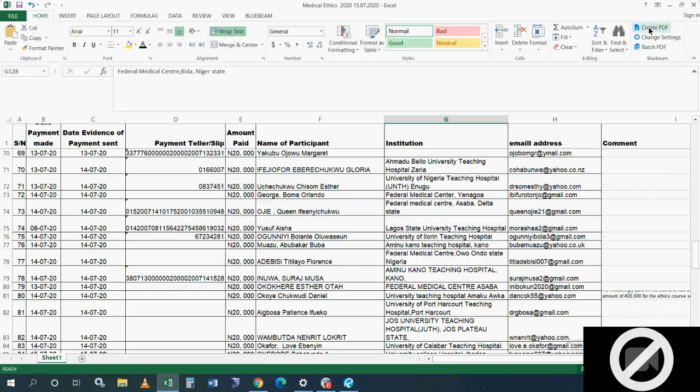You can see the plugin I'm talking about. This is installed in my Excel. I believe you can all see my cursor, right? So at this top right corner of this Excel file, you can see this is a plugin installed by Bluebeam on my Excel application.

So then there's Edit. You can edit files. Maybe you did something, you can undo. Although there are also shortcuts, Control Z, Control Y. Somebody said the most powerful tool in a computer is Control Z. If you make a mistake, you can undo. All right. So you can cut, copy, paste, delete. You can edit content. You can edit PDF. If there's something on a PDF file you really don't want anybody to see, or you want to remove, you can just cut it out, erase it, or what have you.

Then you can view, rotate, fit to page, manipulate your view. Then you can insert headers. Imagine you have a PDF document of about 400-500 pages, and you want something to appear in the headers and footers. You can do that here and apply it to all of the pages.

Now, there's something about collaboration in the construction industry, which we call coordination of drawings. You will agree with me that there are instances where the architect has done his own drawings, the M&E guys have done their own drawings. The usual practice with traditional procurement is that you get to site before you discover that there is one element in my structural drawing that is clashing with my mechanical and electrical drawing. But in our own little way, with these 2D drawings that our architects are creating, if they deliver them to us in PDF, we can overlay some of these things. I hope time will allow me to demonstrate this.

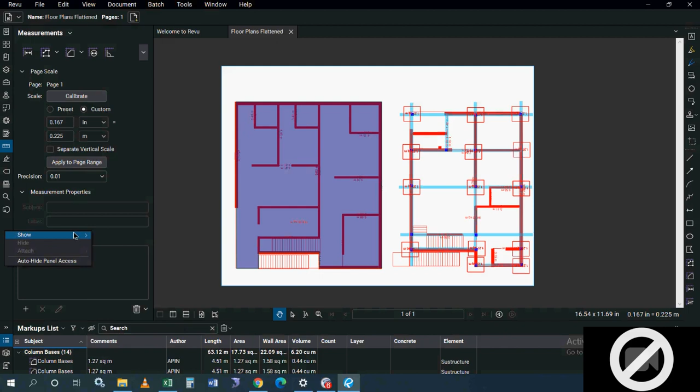Now if I want to make some of these inactive, let's say I don't want the bookmark to show. Okay, it wasn't showing already, but now it's showing. So for anything that doesn't show initially but you want it to show, or you want to remove it, just come here and do whatever you want with it. So, measurement.

Now there are quite a number of tools for measurement. You can drag wide or shrink this panel depending on how big your screen is, so that you can play around with your drawing. Now this is a length tool. This length tool can measure the distance between just 2 points. Assuming I want to go from here to here. Now let me make this document plain so that we can start from scratch.

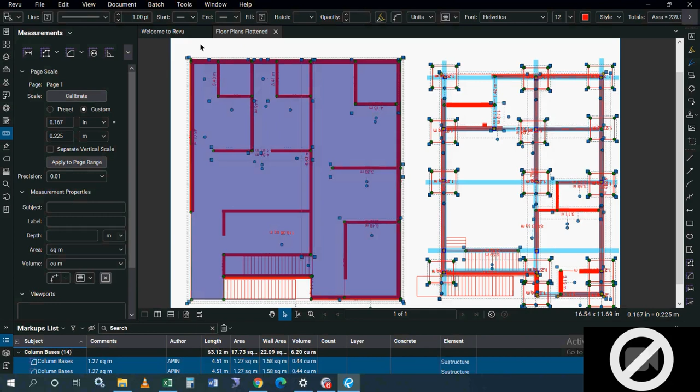Alright. Okay. Now, save as. If you have not saved your document before, you just want to save. So you come to file as I've done and you click save as. Then I have a clean document, sort of.

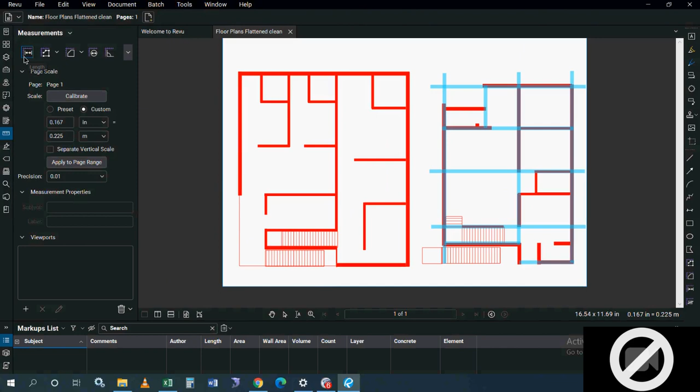Okay. So like I said, this is the length tool. What it does is measure the distance between 2 points. It cannot do more than that. You understand? It measures the distance just between 2 points. It wouldn't do more than that. Now, you want to use this polylength tool.

This polylength tool, knowing that we do a lot of measurements and we move from one direction perpendicular to maybe at an angle while still trying to take off an item, you want to make use of this polylength tool. The advantage it has over the length tool is, you can see, I can do multiple directions as I want.

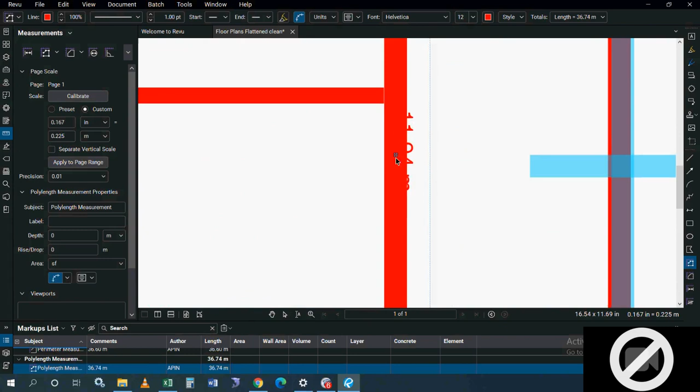Now this drop down arrow beside the polylength tool takes us to another tool under that same section called perimeter. The difference between the perimeter tool and the polylength tool is that the perimeter tool will just total all the lengths you have taken and, once you are done, give you one single figure for the length. Whereas the polylength tool would have segmented what you are measuring. So now we can see each segment having its own length. Every direction I turn has its own length.

Now you can make this bolder. When you select a tool to measure, you can come to properties, this gear icon. When you select an item and you want to make it bolder, you can come to the appearance section. You want to make it bolder, and where is the offset? Change the color to something different from the color of the drawing.

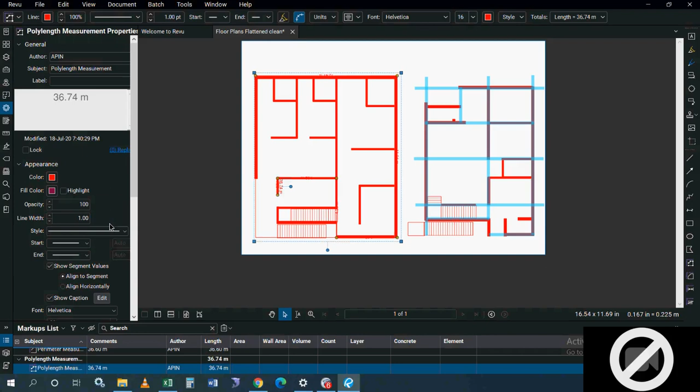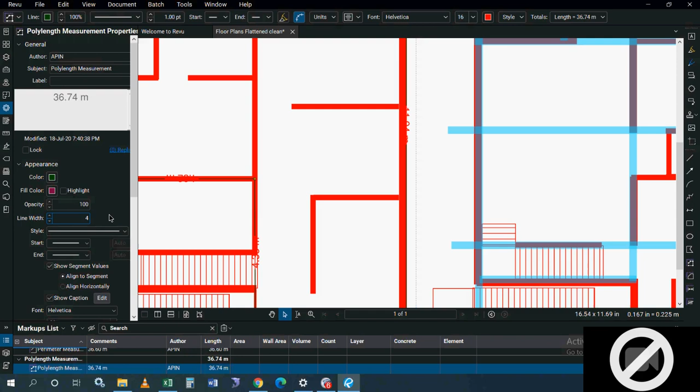Perhaps you want the line width to be slightly bolder, and the color of the text to be distinct. You can set those properties to make your information more glaring.

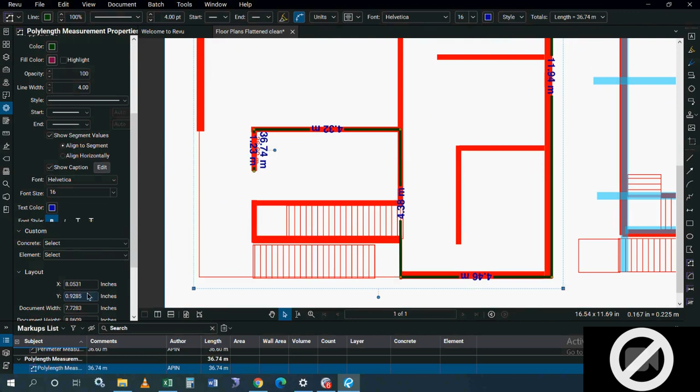Now, one beautiful thing I'd like to note is that when you make use of a tool and set its properties, you don't have to go over these settings every time you want to use that particular tool.

You can choose either of two things: set this tool as default, or add it to the tool chest. Once you add it to the tool chest, that thing is always available for you.

Now we can see on top of the tool chest, this is the icon that represents the tool. Under my tools, you will see straight away polylength measurement is available for me.

If I click on it, it's available in this format. I can duplicate it like this, or if I don't want to duplicate it, if I double click, it's available for me. I can measure and it will carry those same characteristics.

You can see it carries the same characteristics like the last thing I did. So for every measurement tool that I use, we always find it here under these recent tools.

But one beautiful thing about making sure you add it to my tools is that if you leave it alone occurring in my recent tools, once you restart Bluebeam, shut down and restart, I can assure you, you will not find that tool again.

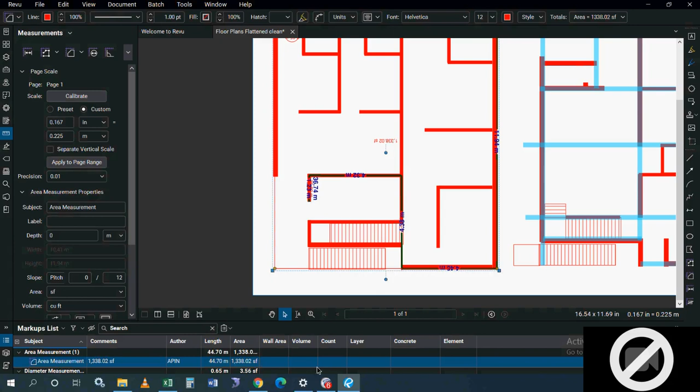So now this markup list that I mentioned earlier will be gathering all the measurements you are doing as you are progressing. You don't need to bother yourself writing it out somewhere. As you are doing the measurement, it is populating this section. You can drag up and down, depending on how you want to.

So then we have some other tools. The other one is the count tool. When we want to probably count doors, you can count, you can count, you can count. Then you find it summing up what you have just counted. Count measurements, you have just counted 3 items.

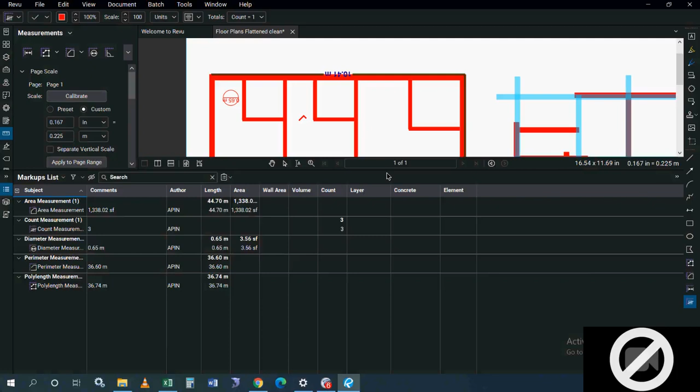So then we also have, in the area tool, cutout. One beautiful thing about cutout is that when I'm measuring the slab for a suspended slab, and the staircase is going to feature somewhere here.

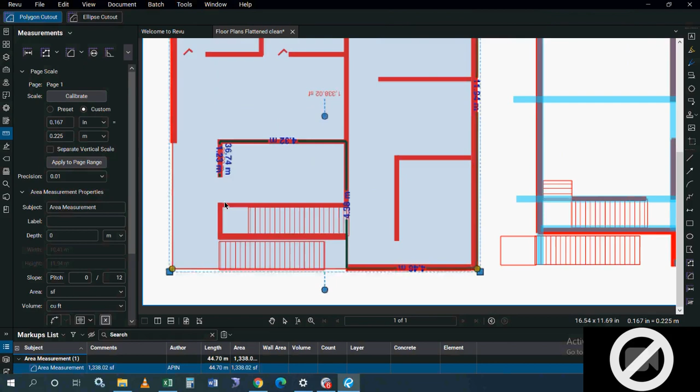So after taking the area measurement, I can still go ahead and just cut out, because I'm not going to cast this area. Then I just come, I just do the cutout.

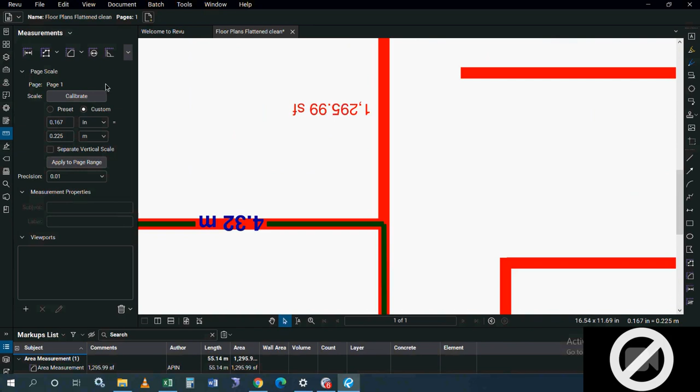Now, before our time really runs away, let me do a demonstration of some basic items of measurement. So let me do a workflow. Now, let me delete and make this thing clean again.

All right, so I'm a QS. I've picked up a drawing. I've just received a drawing from an architect, a 2-bedroom bungalow.

Let me just focus on this. All right, let me just focus on this. This is a ground floor plan. This is just an illustration drawing, a ground floor plan. We can use - I use PDF to do this illustration.

Now, time will fail me to show some other tools, but if you see this top right corner, there are some tools there. You have line, you have the arrow. With this line and some other tools here, you can create an illustration, you can illustrate a plan maybe for discussion.

You cannot - I'm not saying you should carry out the responsibility of an architect. But assuming, like with a discussion between me and a client, I say okay let's illustrate it, then I carry on how we can share space and all of that. So that's that. But today we're only focusing on the digitizing quantity takeoff.

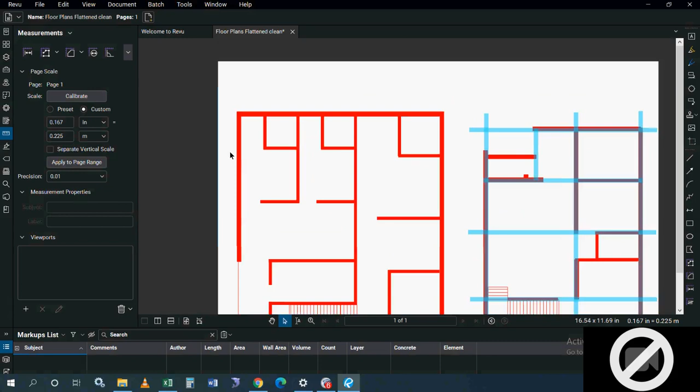In fact, even if there was no dimension on a drawing, Bluebeam gives me confidence that I can do some relatively accurate takeoff. Now, I can see that this is a wall, this is an external wall, and relatively they will do the external wall with a 225mm block. So either I consider the finish or I limit it to just the wall.

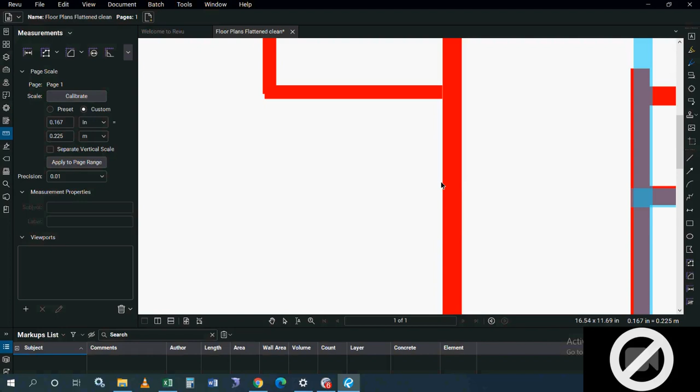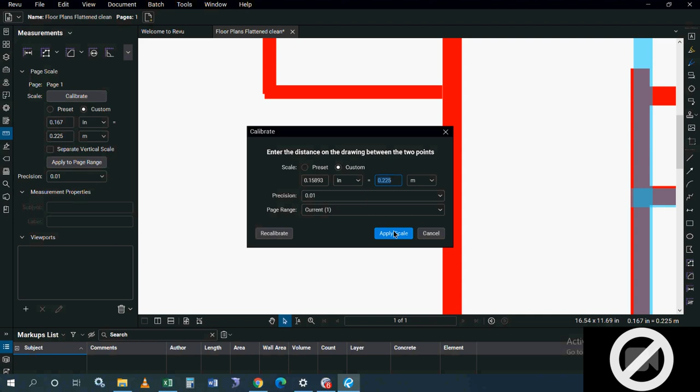I can calibrate and tell Bluebeam that I know 2 points. I tell it, okay, this to this place is what. Now, I will tell it that my unit is in meter. And I will tell it that the thing I've just measured is 225, that is 0.225 m, so that it can always recognize anything I want to do.

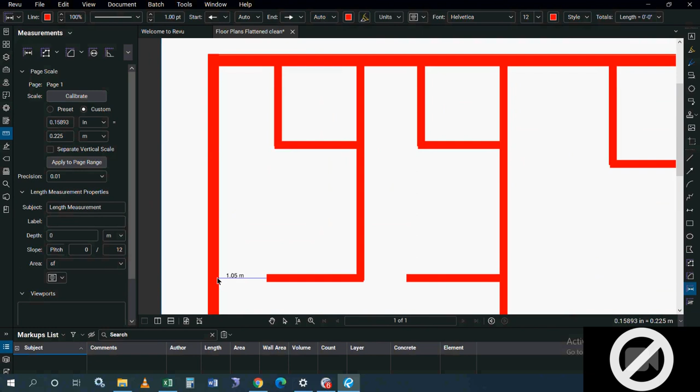So for example, now if I want to measure just these 2 points, between these 2 points, now it makes sense that this is a door opening, still at 1.05. I don't know if we are following.

Can I quickly check how many people have followed me this far? Now I can see somebody saying the left part of the screen is not legible. Now I want to advise us all to put our phones on landscape mode. It will make whatever we are seeing on the screen a little more bold.

Now, by the way, when we are doing a webinar like this, my personal preference is to use a computer. A computer makes me see whatever the presenter is presenting much more clearly. That's, by the way, a personal preference - it's up to everyone to decide what they prefer. All right, so back to our workflow.

So I said the first thing I want to do before I start measuring is to tell the computer that from this place to this place in this drawing is 1 meter, so that every markup, every measurement I try to do is going to be as accurate as possible. So calibrate is the first thing on my workflow.

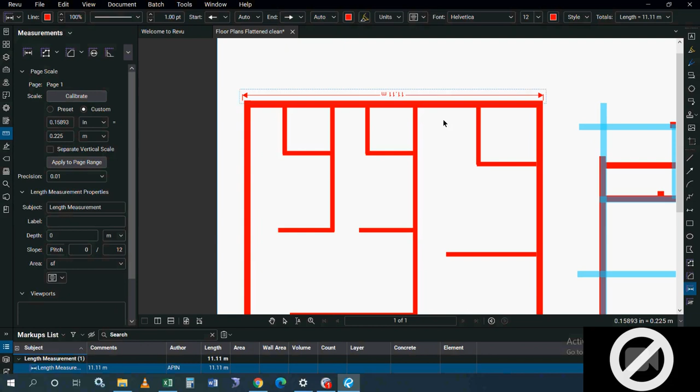To do that calibration—but that doesn't mean we always remember, even when we've written down our workflow. At times we forget. I didn't calibrate the document, so I've done measurements, I've calculated this and that, because the client is putting me under pressure. I did that measurement and forgot to calibrate. Then all of a sudden I remember that I've not calibrated.

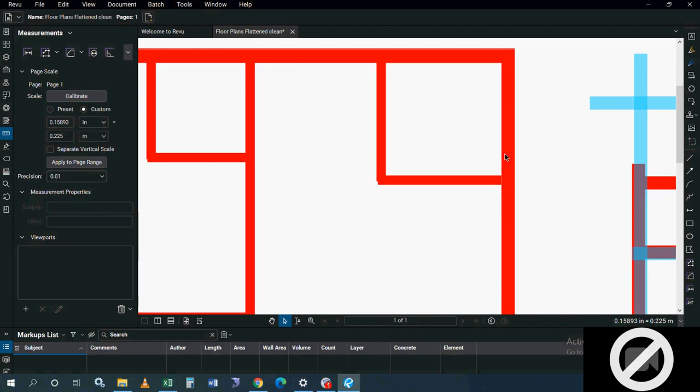We can still come back to that calibrate and then apply the right scale. All right, so that's that. But the first thing on the workflow you want to ensure is, let me do my calculation, tell the computer that when I measure from here to here, it is 50 meters, so that it will give me as accurate a result as possible.

Now, so let's say I'm now in the foundation. What I want to start with, let me say it's a virgin land. The client has just bought a plot of land. We need to do site clearance, so we need to clear the whole site. All right, so my first item.

Now we want to use the area measurement tool. The BSMM requires that you measure site clearance in square meters, so that means you need the area tool—it doesn't have depth. So when you select the tool, you define the subject you are trying to measure. Now this is dependent on our imagination.

But I like to, as much as possible, name what I want to measure, name it, even though at times what I am measuring will be useful for another item of work. You'll get to see what I mean by that.

All right, so now I want to measure. Let me back up a bit, and try and illustrate. Let's assume the site boundary for this land. Now I'm borrowing the rectangle tool, and I want to assume this is the whole site—undo—I want to borrow this rectangle tool, I want to assume this is the whole site, this is the boundary of the site. All right, now so I want to do site clearance now.

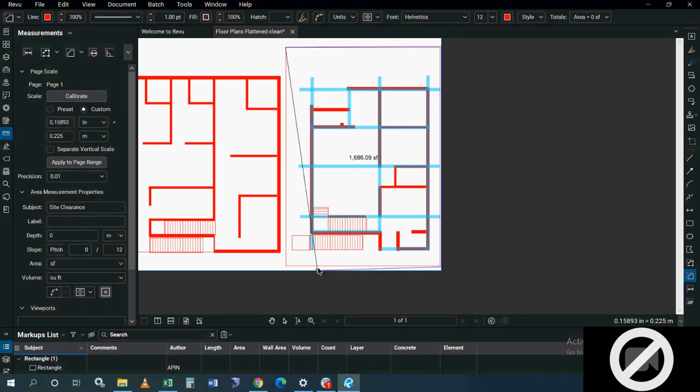So I've picked my measurement tool, the area measurement tool, and I'm declaring my subject as 'site clearance.' Now then I pick it—it's a fairly rectangular site. Assuming it wasn't rectangular, I can just start going from one corner to another corner to another corner. You understand?

Why is it telling me my measurement is in square feet? Now, we have just observed that I keep maintaining the square foot, and I said we're coming back to that. So to correct that, when you are selecting your tool, you want to ensure the unit of measurement is square meter, and that your unit of volume is cubic meter.

Now, like I said earlier, I want this to be a tool that I can come back to later. The way I do that is, I've shown you the first way, where you come to properties and set all the parameters, adjust all you need to adjust—okay, it's changing my line pattern, changing my style—so then I add it to my tool chest, so it's available for me anytime I want to do any site clearance. You understand? I just double click, then I can go ahead and measure any site clearance.

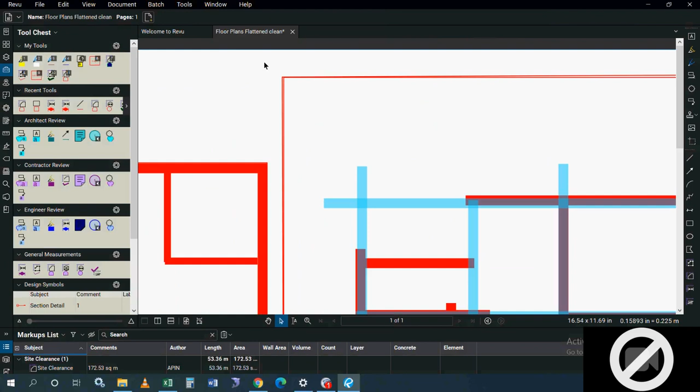And in case I remember, oh no, there is one rock here, or one rectangular element here that we are not going to clear, then I can come back, like I mentioned earlier, and select the cutout, polygon cutout, and take out that aspect that needs to be omitted, so that you adjust your quantity. Alright, so that's that about site clearance.

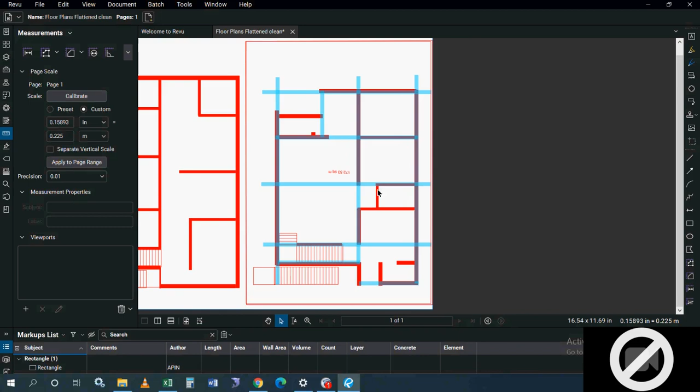Now, probably the next thing is you want to start digging it out, or you want to remove your topsoil for the footprint of the building. You understand? Now, I've done some training in some firms, and they tried to ask me, okay, how do you take care of the spread of the foundation when you are doing your topsoil? Now, I usually tell them there are either of two ways to it. It's either,

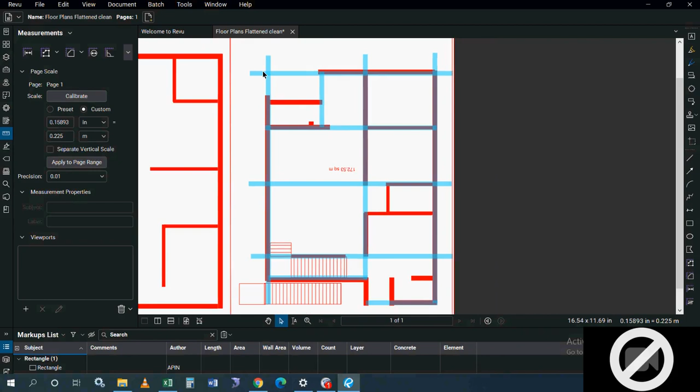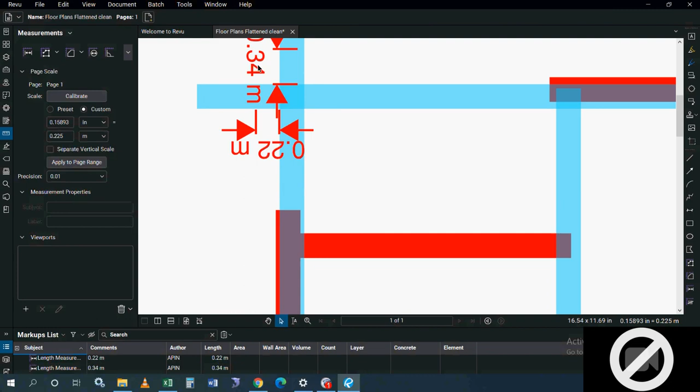you know, I try to use this. I want to add 225 to this side. I want to add 225 to this side. That's 0.34. I can edit it to be accurate. 225. All right. I can edit that. 225. So we adjust that thing. So what does that do for me? That gives me a fair idea of what I want to do. So when I want to do my topsoil, I've carried my area measurement, I'm doing my topsoil removal.

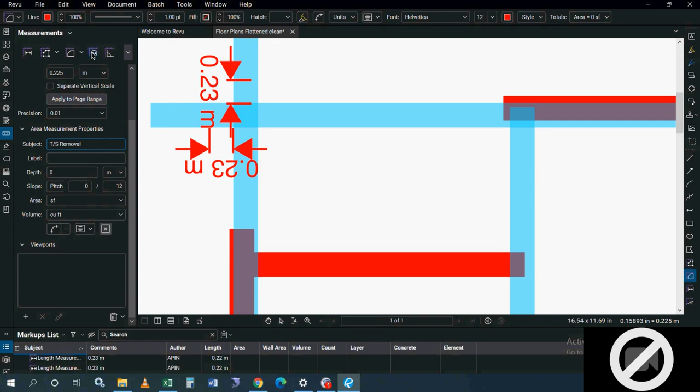Alright, so I'm not starting from the footprints of the building, I'm relatively trying to guess. Now, it's not starting at the edge, so I can drag to the edge. I'm dragging to the edge. I want it to be right at the edge of this. So now that means my topsoil is starting fairly at somewhere here and not here.

So then I drag, and I could repeat the same process at this corner to be as accurate as possible, but I could just drop my topsoil removal right there. And like I said, you want to ensure that this thing is going as square meter, and to stop coming back to this thing, like I said earlier, you can come back and set this as default. So that next time I'm carrying the measurement to area, it's doing it in square meters straight away, not in square feet.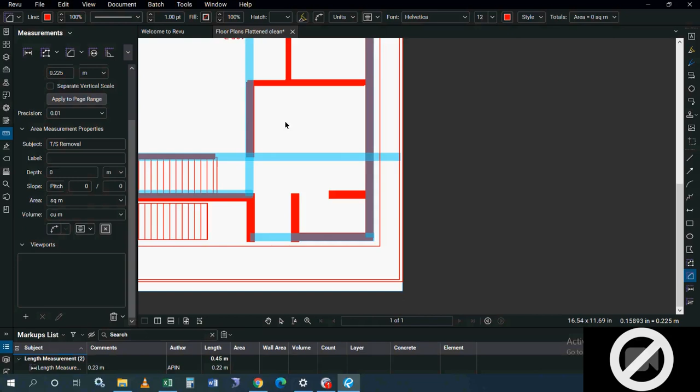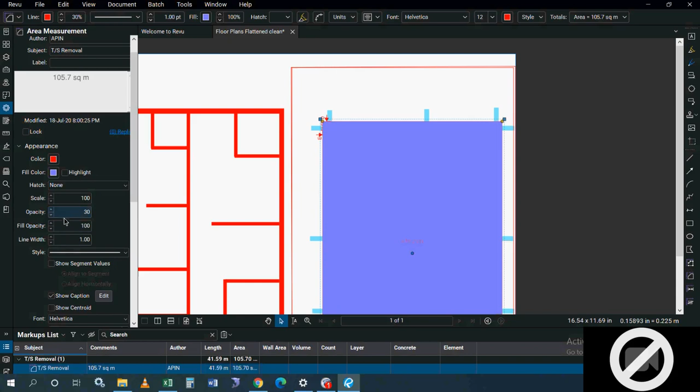Alright, then in order to identify some of these measurements, to make them unique, like I've just done my topsoil, I can decide to come to the settings and just give it a different fill color. Let me give it a different fill color of, say, purple, and then set the opacity so that I can see what is behind, maybe to 30%. I'm setting the opacity to 30%. So that makes me see what is there. So I can still go ahead and do my measurement.

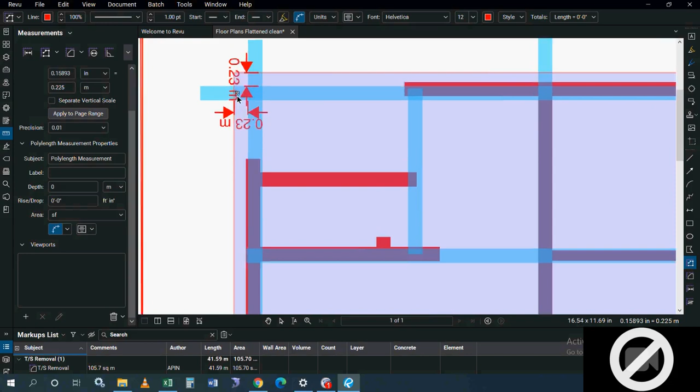So the next thing I want to do now, you want to do your trench excavation. And like I mentioned earlier, you either pick the perimeter tool or the, what is it called? And by standard, we work a lot with center line girth. Now, this is where you've got to be careful, because there's no need coming back to do some deduct corners or what have you. So to make your measurement as accurate as possible, you want to zoom in, like I've done. You understand? When I'm working with this software, I like to use an external mouse. I don't use the mouse of the laptop. So it makes the zooming quite easy. So I like to zoom in.

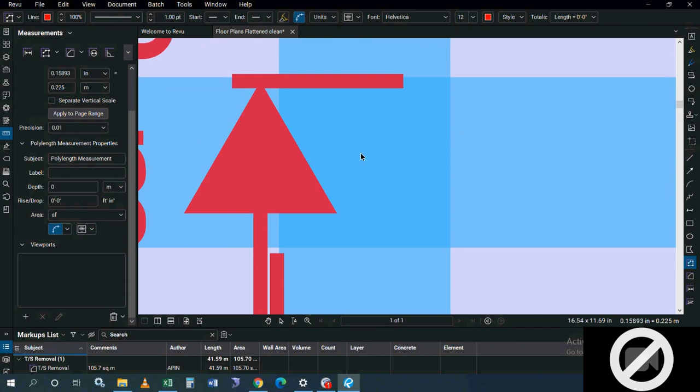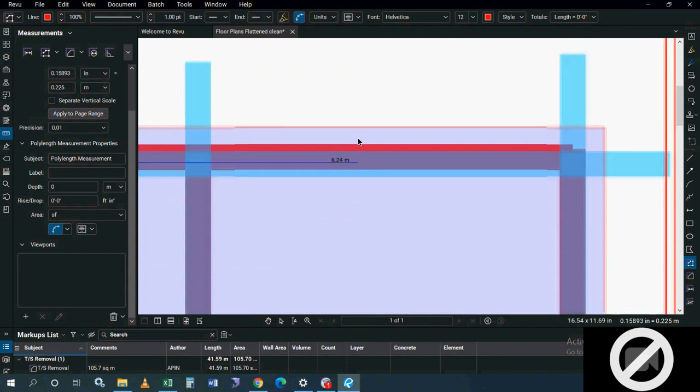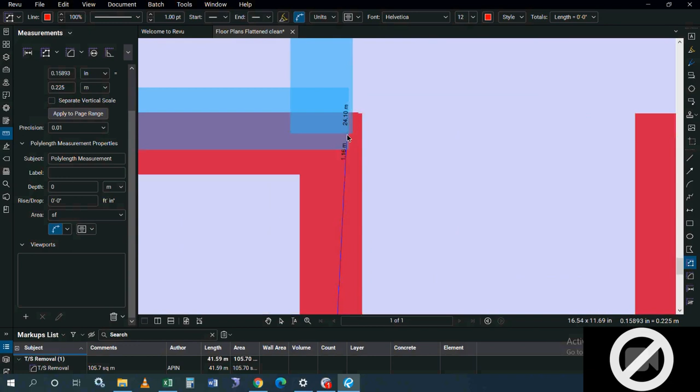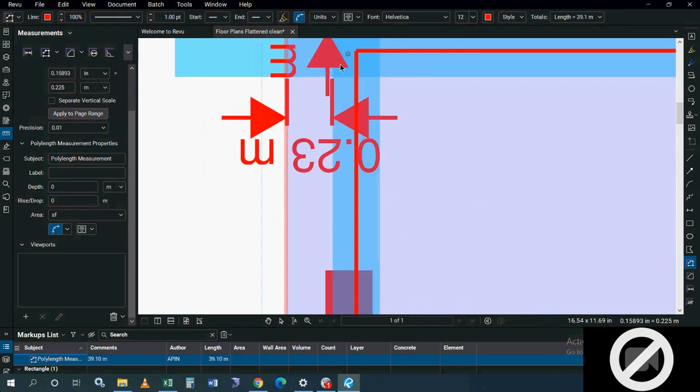Now I like to come as close as possible to the center of that wall. That's where I begin my measurement from. And to make my measurement as straight as possible, you want to press down the shift button. You can see it snaps the measurement to make it straight. So as I'm coming, it's going to try as much as possible to maintain the center as well. Then it snaps at the center for my external walls. I'm still holding down the shift key because I want my line as straight as possible. Then I'm coming back to my starting point. You can see, voila, I'm there. That's the center line girth.

Although, like I said earlier, while I was doing this now, I forgot to describe the subject of what I'm measuring. But that doesn't spoil anything. Then I have the measurement that I've just done. I have it highlighted, I have it selected already. Then I can come back and edit the subject of what I just measured. I started measuring my trench excavation.

Now, one thing is, this is my first time using this tool on this drawing, so I'm setting the parameter, and then I want to go back to ensure that going further it's going to take this as default, so I don't have to set that thing again.

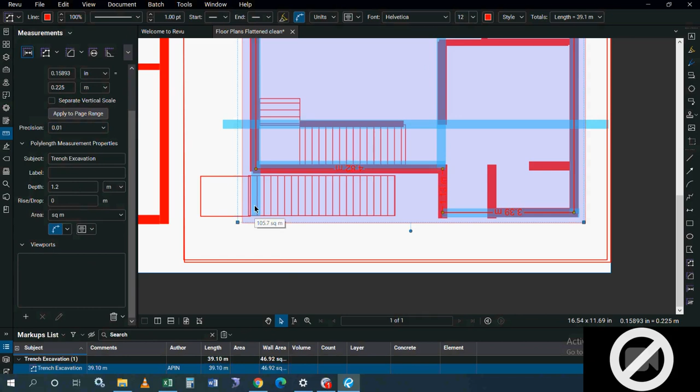All right. So now I'm sure somebody is wondering, my trench excavation is in cubic meter, but what I've just done, I've measured only in linear meter. And as I set the depth, there's something it quickly did for me here. It has given me the wall area of the trench excavation.

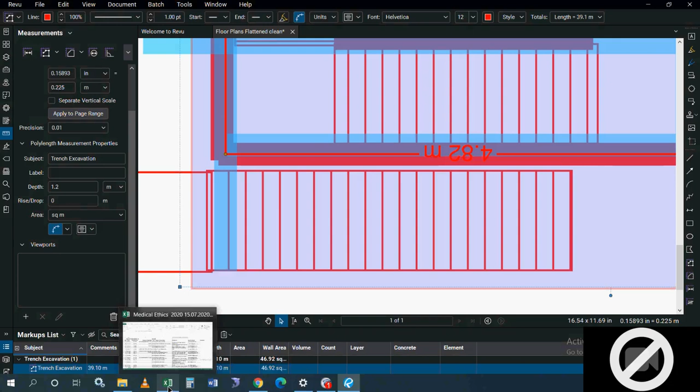Now, there's a capability that Bluebeam introduced right from Bluebeam 2017. I'm working with Bluebeam 2019 here. Right from Bluebeam 2017, they created an integration with Microsoft Excel. Let me quickly just demonstrate that. We're running out of time.

Now, what is this capability that they have provided? Let me see if I can open a bill, or for the sake of time, assuming this is my bill, I have my description, I have my quantity, I have my unit, I have my rate. You understand? Now, there are quite a number of ways that Bluebeam introduced for us to interact with Excel.

Let me add the rate and the amount column. All right. Now, assuming this is my bill, I can bring in quantities of items. Assuming I've gotten to my trench, and this particular trench that I'm dealing with now, I can bring in my quantity from Bluebeam. I said Bluebeam installs some plugin on some of our software as we're installing Bluebeam.

Now, if you right-click this cell, then first save it. What's the matter? All right. So what then is the problem? Now, if you observe my screen, in the drop-down arrow, you can see this option. I don't know why it's not coming up here. But what I was about introducing us to is this first item on this drop-down.

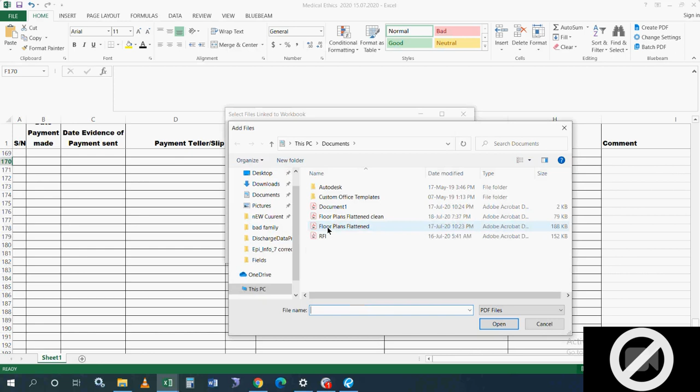When you right-click a cell after installing Bluebeam, there's this thing called quantity link. What does it do for me? It can help me interact my Excel spreadsheet with my Bluebeam. So I click on create. It takes some seconds. I click on add. I will add the file I want to link my Excel file to. We are working currently on this file. Now, it has captured this. Say OK.

Then it will ask me, what quantity do I want to link? I want to copy the quantity in my trench. Now, that's the area. All right. So, now let's go back here. Let me edit. What I wanted to capture is wall area. Now, we can see wall area, which subject? It is the wall area of what? Trench excavation.

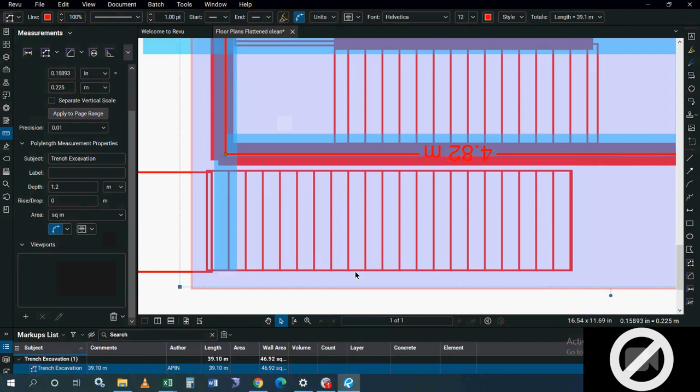Bam. So, then you can see what we have here is 46.92. So everything I described in my bill, trench excavation, I can go ahead straight away. Assuming this is the quantity column, I just do this times whatever the width of the trench excavation is, let's say, 0.675. Now this formula to round off. Alright, so I've got 32 cubic meter.

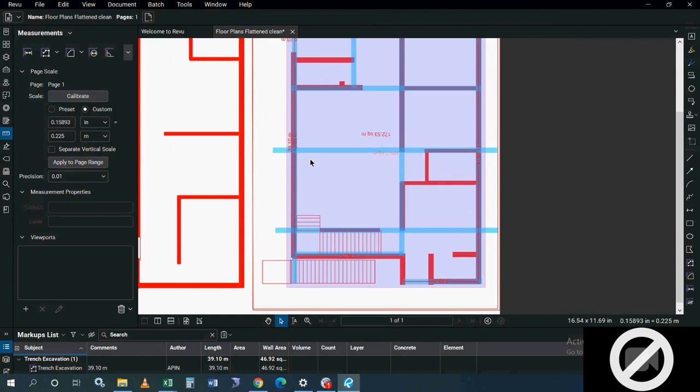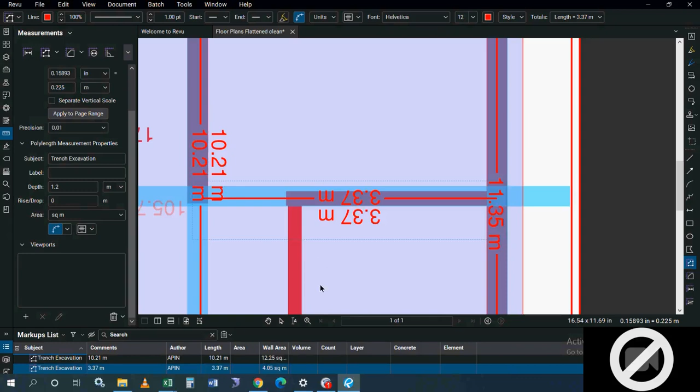Now the beauty of this quantity link is that, assuming for one reason or the other we have not finished the measurement, and we continue to do the measurement, and it's still trench excavation, so let's say we have not added this, then we added it. Now straight away we have seen that it has added this, right? Now we need to add this. All right.

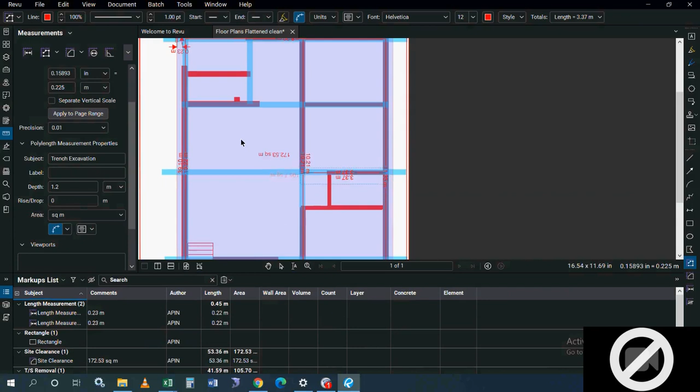Let me drag this markup list up. So we can see for our trench excavation, it kept on increasing, right? Now, as it is increasing here, I can bet you it is increasing here, capturing anything that goes on. That's one beautiful thing about this application.

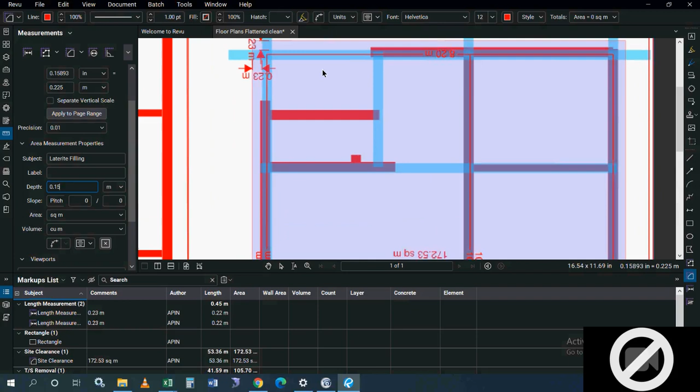Now, okay, let me not jump the filling. It depends on how we are comfortable with. Assuming I want to do the filling. The filling is what? Let me say I want to do the laterite filling. All right. Now, the depth of the laterite filling is 0.15. All right. So I'll just come. Realistically speaking, these are the areas I want to fill.

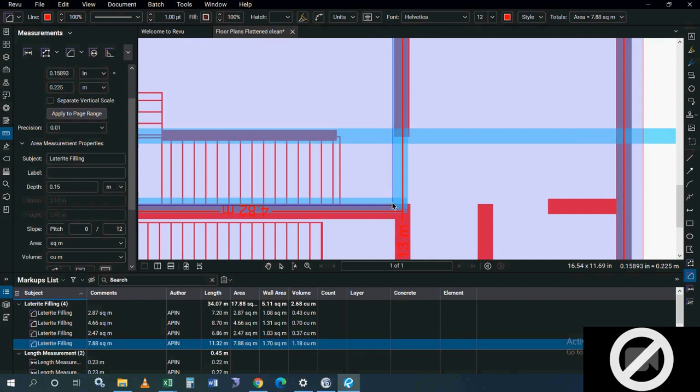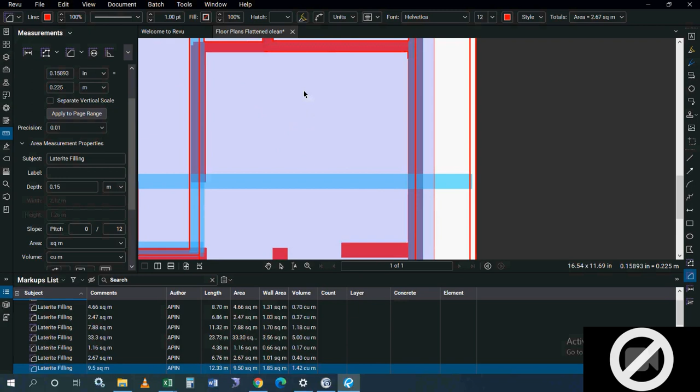I'm done with that. Then my DPM, assuming I'm doing reinforcement, fabric mesh reinforcement, all of that. Like I mentioned earlier, you can use one to do several measurements. Now I want to do the oversite concrete, or let's say there was hardcore, or a fabric mesh. It's a square meter area I want to measure, but let me do the oversite concrete, which is a cubic meter item. So the depth, for the sake of our conversation, 0.15.

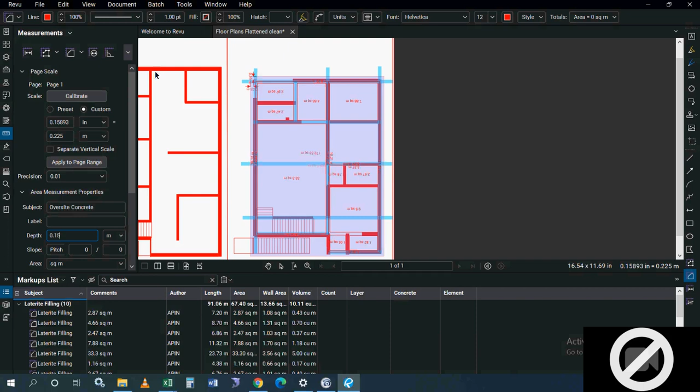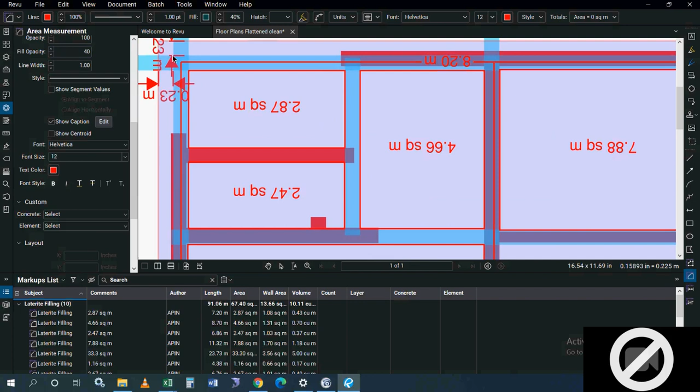Now, I just go straight away. Let me set the properties. We fill to this. We fill opacity to 40. And then I go straight away from the footprint of the building to this point, to this point, to this point, to this point, and to this point, bam. So I'm done with my oversite concrete.

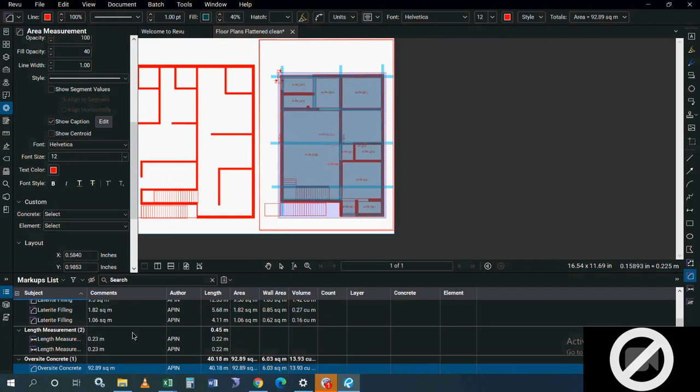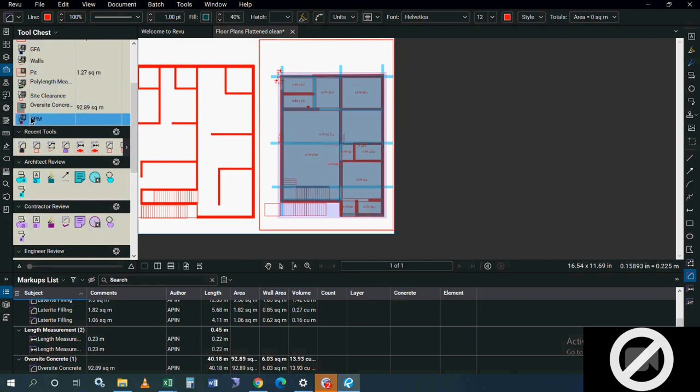Now I could add this, like I mentioned earlier, to my tool chest, my tools. It's there. Oversite concrete is there. And in case I want to duplicate it, you understand? But I want to change the properties. I want to change it to, this is my oversite concrete now, but I want to change it to fabric mesh reinforcement, or my DPM that is over the site. So I can as well do DPM. So DPM is in square meter. You understand?

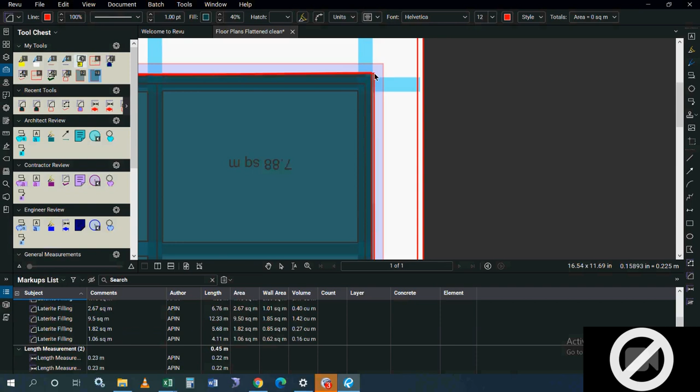So now what I did here to change the way it's listed is I click the gear button. Then I choose the symbol mode, so it is now a tool. If I want to measure my DPM now, I just select it. I'm duplicating this measurement. Bam. I've done my DPM. If you come down here, you can see DPM. It has been measured straight away.

Now, even though it's measured, it gave it a depth, I can edit the properties and just tell it that it doesn't have a depth. My DPM doesn't have a depth under the measurements. Depth is 0. All I need is just the area. You can see it has taken away that. So for fabric reinforcement, we can just do the same; this is the capability that this thing has.

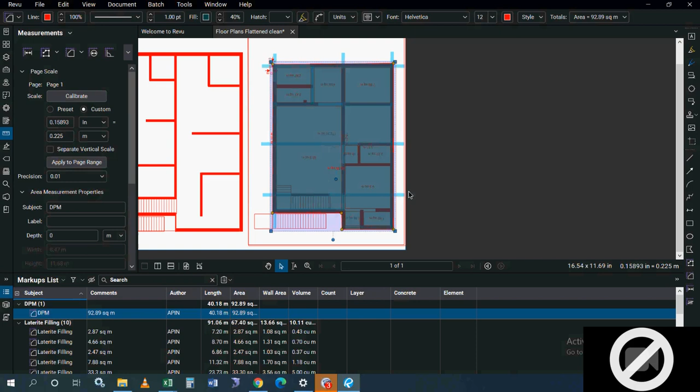Now, I'd like to show us something before we close. Assuming we've got into finishes, I want to measure finishes. We could have different types of finishes. So I want to show us just a capability. I wish that we had time to show us how we can build up rates and include rates in this thing.

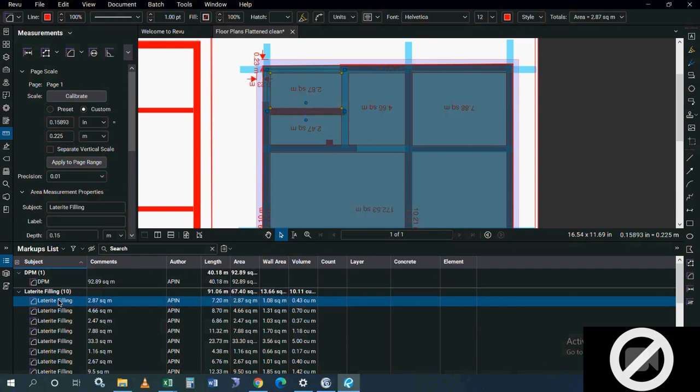Alright, so now I was trying to introduce us to something in this markup list. Now, assuming I was doing finishes measurement, now I did laterite filling. I can duplicate laterite filling. Do you understand? Let's say I'm willing to, let me not duplicate. Let me do the finishes. Right? Let me say I've gotten to finishes. Then my settings, I'm setting it on a different color. Let me give it a pink color, opacity of 30.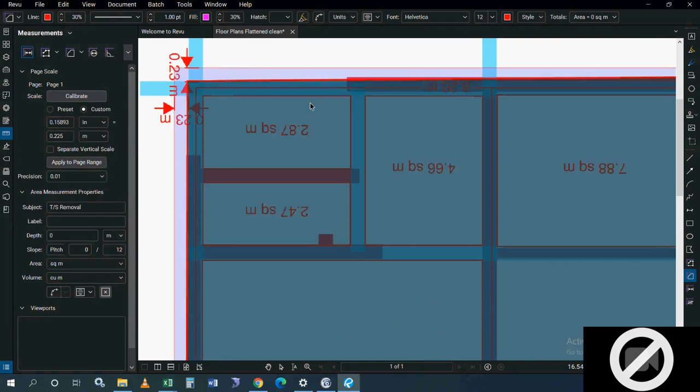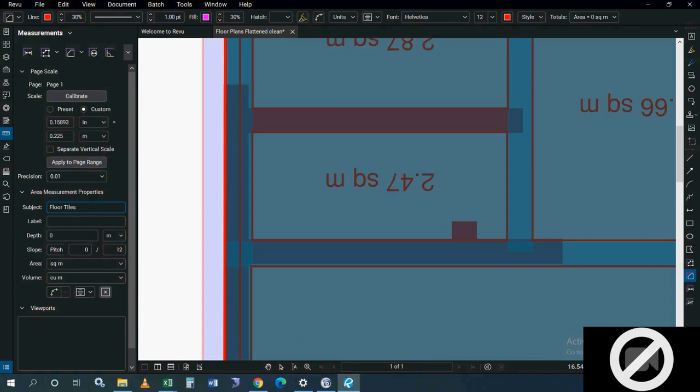Alright, okay, so back. Alright, now, let me just take the wet areas, just for the sake of conversation. This is one toilet, this is another toilet. So let me just take these two. The floor finish. Now what do I want to measure? Let me say floor tiles. Alright, I'm measuring floor tiles.

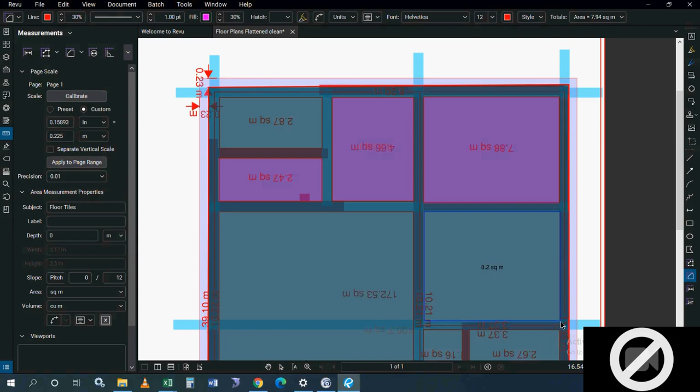Alright, so now let me just take a couple of areas. This is one area, this is one area, this is another area. Now this is another area. Alright, now in my markup list, I've done my floor tiles, but I can add, you can see columns here. Now these columns are showing the information, alright, more columns depending on the level of information I really want to provide. I can even add options. Let me just deal with that.

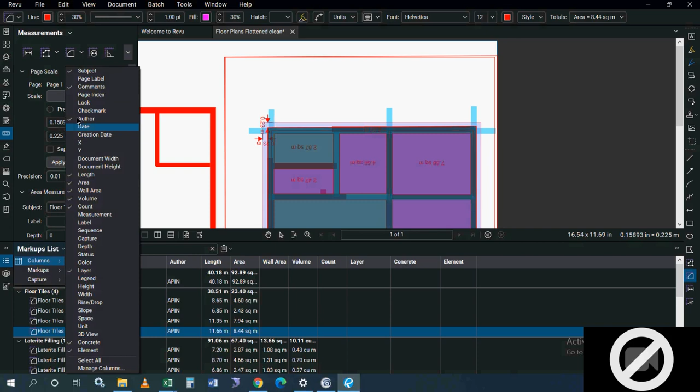Now when we come to markup list, there's a drop down arrow beside it. When you click the arrow, you see columns. Now when you click on the columns, you have options here, and you see manage columns. When you click on manage columns, you come here, you can set the order. You can choose which columns you want to see and the ones you don't want to see. You can come to some columns to add.

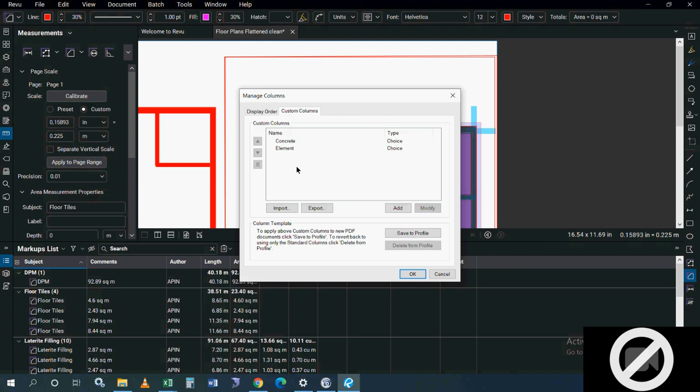Now that we are dealing with the issue of floor tiles, in the toilet we probably want to use vitrified non-slip tiles. Now, maybe in public areas, in other areas, you can use the glazed ceramic. So let's just assume we have those two options. Now, I can come here. I have 1, 2, 3, 4, 5, 6 kinds of information I can add to that one item. Now, I will then choose choice because I'm having options. Now, what are the choices I have?

Let me add. Now, for which item? I have non-slip, whatever way you want to describe it, non-slip vitrified. Alright? Then, which subject does this item relate to? So that it doesn't apply to all objects, and the subject it applies to is what? Floor tiles. So assuming I'm trying to use this document to assign rate. So let me say the rate is maybe 2,400 per square meter. Now I'm applying that. Now what other option do I have?

I'm adding another option. We have the glazed ceramic. Which object? Still floor tiles. Now, what does it do for us? Let's say we are choosing maybe a higher brand. Let's say 3,500 per square meter. Alright, so we have added those options. When we click OK, now what's the name of what I'm adding? I'm just adding now floor tiles. Can I choose floor tiles? Now let's say tile type. Alright.

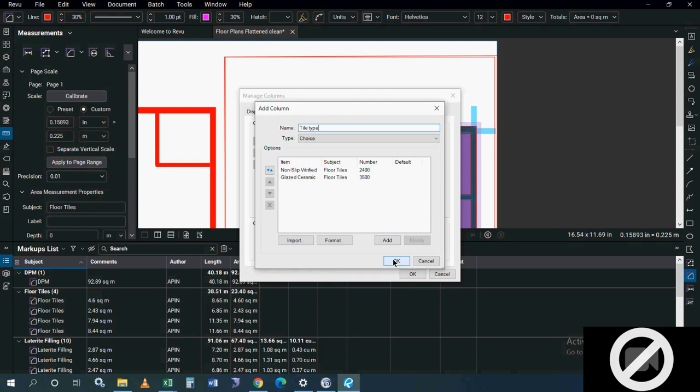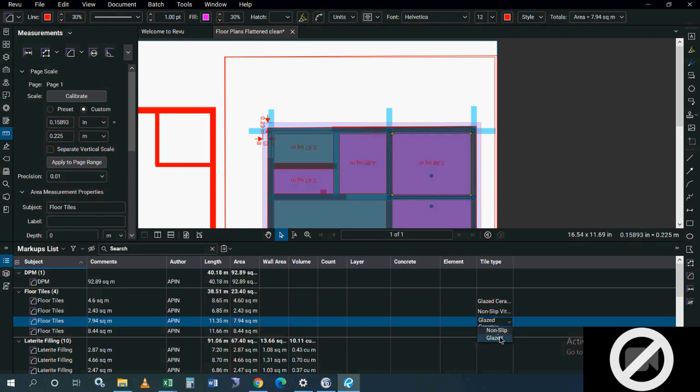Now, immediately we see a new column appear here. And I want to ensure that I differentiate. I mentioned earlier that this area is the toilet. Now, I just need to double click here and tell it that it is what? Non-slip. The other areas, I double click, which area is that? Glazed ceramic. This area is where? Glazed. This area is also glazed.

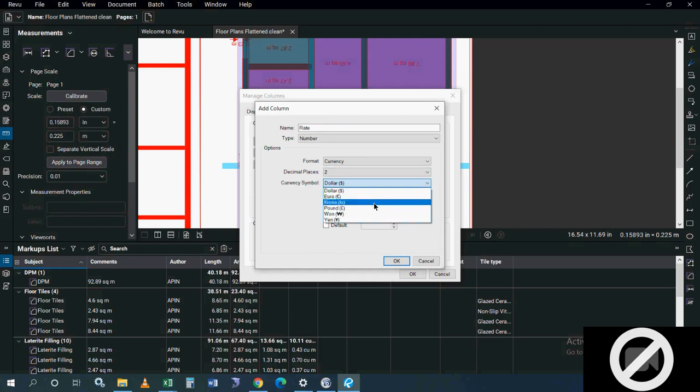Now, where the rate I mentioned earlier comes to play, I can add another column for rate. And in this case, it's not a text. I'm using a number. And I'm using what? Currency. Because there is no naira here, I can decide to leave it as just...